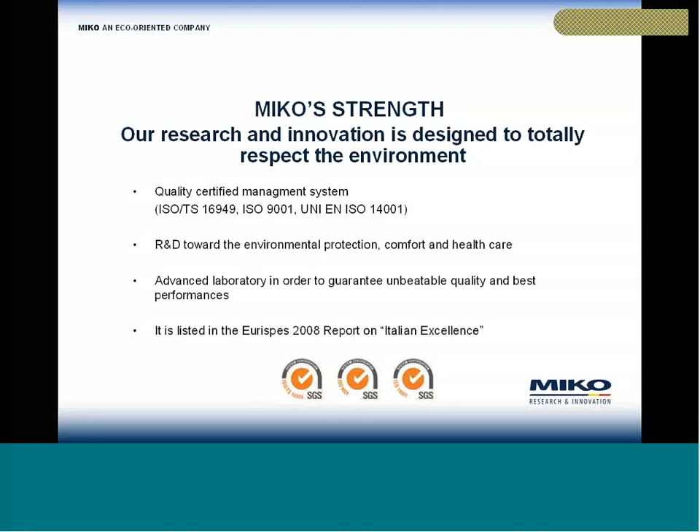As evidence of Miko's accomplishments, it has been listed in the Eurispes 2008 report among the best Italian excellences during 2008. So we are very proud of our latest accomplishments.

Speaking of the sectors of application of Dinamica, we have a wide range of sectors. Some are old ones we've been working on for many years; others are still in progress, but we are developing new products with new performances and qualities.

Looking at upholstery and automotive, which are right now the two biggest sectors in which Dinamica finds its application. Comparing the two, even though upholstery was the first sector ever discovered, automotive is quickly taking over. Miko has registered an increase of 759% since 2007 in the automotive industry.

Going through some examples, here are some different programs we did in the past, just to emphasize the acceleration of the work Dinamica is doing in the automotive industry.

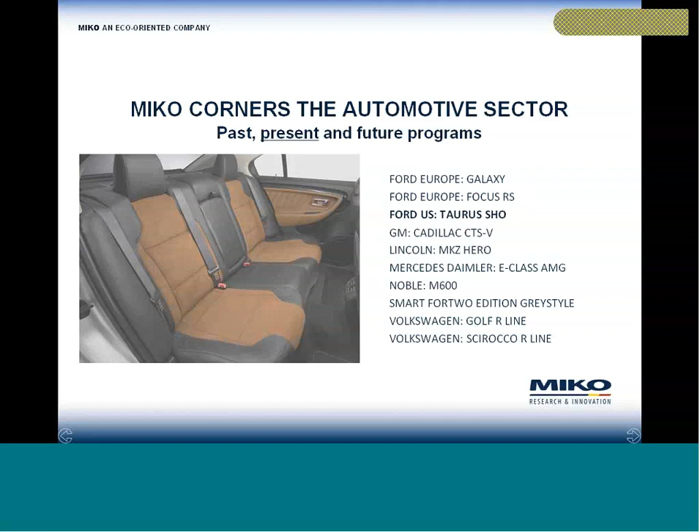Here are some old projects shown at different motor shows in the past. Compared with the present, we can clearly see the number has doubled. Here are cars shown at European and also United States motor shows. Most of these belong to the last year or year and a half, so they're basically recent programs.

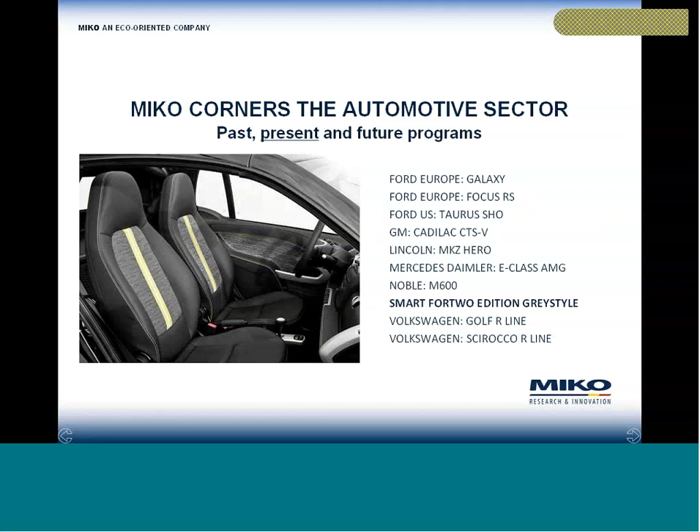And for the future, we already have some programs underway. Some are just in a first stage, others are more developed than just an idea. So we'll see some concrete cars coming up in the near future.

Let me introduce Dinamica, which is the combination of Japanese and Italian technology and research, and it's the first microfiber suede up to 100% ecological.

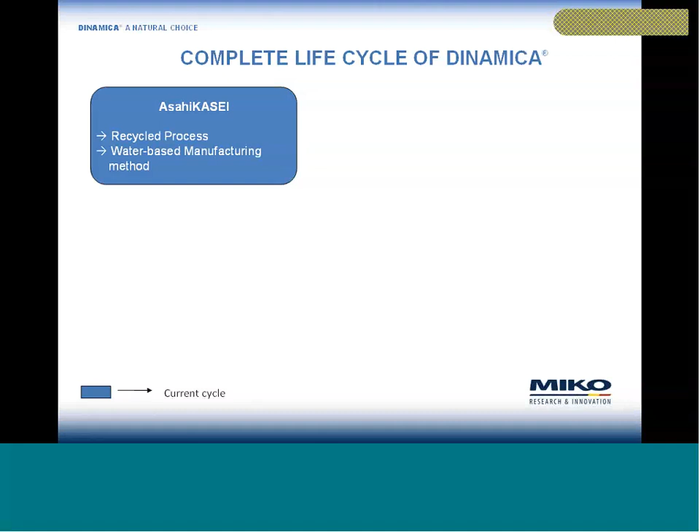The complete life cycle of Dinamica starts in Japan at Asahi Kasei, then goes to Miko, which is settled in Italy. For automotive, we have a laminator working with us, which handles the lamination and partly the distribution. From there, we go to our final clients, represented by OEMs and Tier 1s.

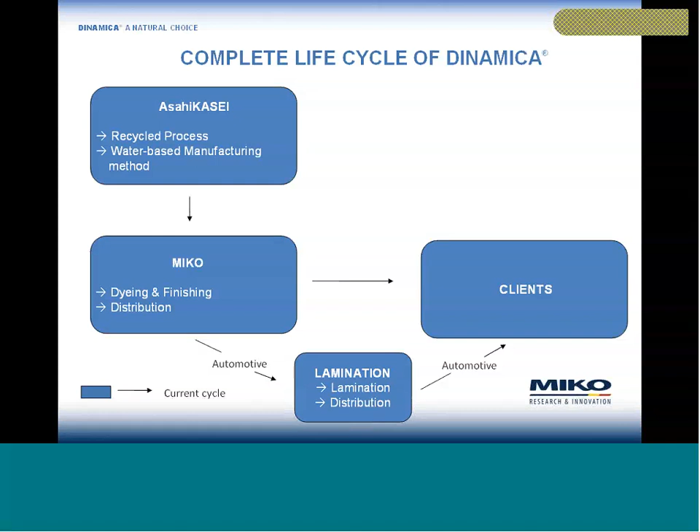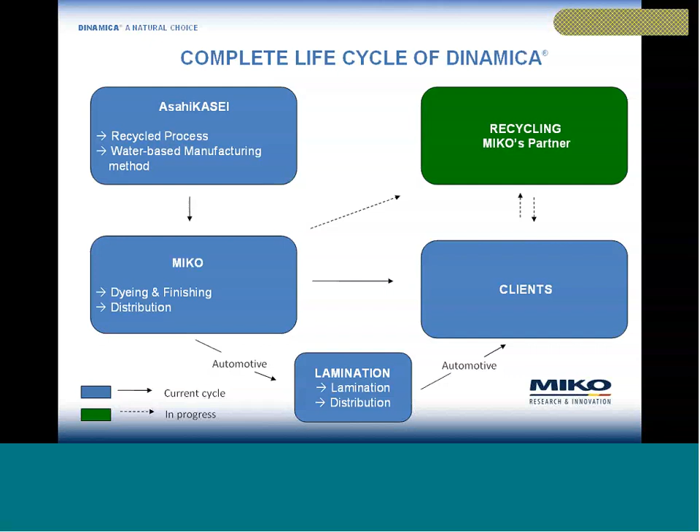This is our current cycle, which is what we are actually doing right now, but we are also developing the very last phase of this life cycle, which is the recycling part. This part is still in its first stage and still in progress, but we are really trying and hoping to further develop this last step in the future.

Before talking about the actual process in making the raw substrate of Dinamica, I want to share some information regarding the recycled part of the polyester. Dinamica is made with recycled polyester, which is taken from a recycling process.

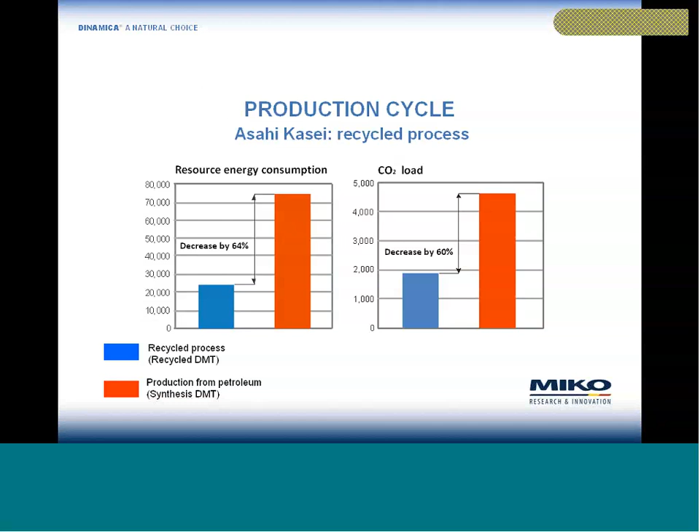Recycled fibers such as T-shirts or other polyester clothes, PET bottles, or other plastic objects are recycled. Comparing this process of obtaining polyester to the classical cycle of making polyester from petroleum, we can see how the energy consumption and CO2 emissions are largely decreased. This number should be kept in mind for final consideration regarding the environmental impact of our product.

Starting from Asahi Kasei, the ultra-fine recycled polyester goes to spinning and cutting in order to obtain a fiber which is very fine. We are talking about 3 to 5 millimeter length, but at the same time very resistant.

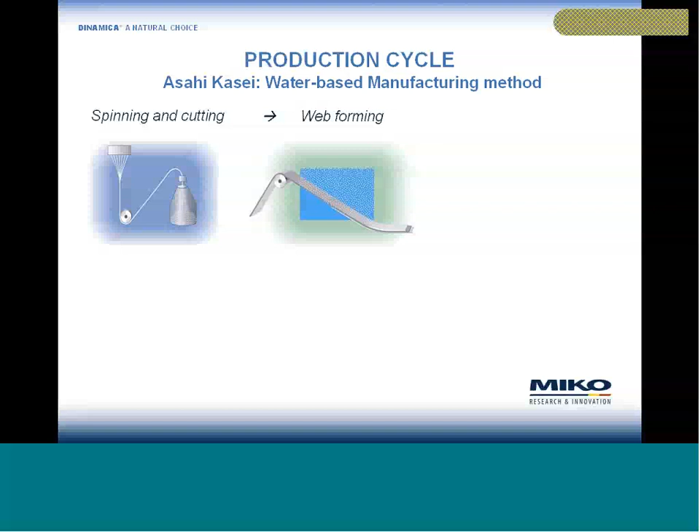From the cutting and spinning, using what is also known as the wet-lay method, the cut microfiber is dispersed in a water solution. A support screen runs through the water and catches the microfiber on the surface and on the backside. This cut microfiber is then laid on the screen, and during the next phase, water needling, high-pressure water jets fix the microfiber on the screen.

The two layers, on the surface and the backside, are entangled with each other and the screen without any damage to the fiber. During these two phases, all the water used during production is then cleaned and returned into the environment. So we can clearly see that even though the production cycle of making Dinamica is based on water, there is no waste of water at the end of the cycle.

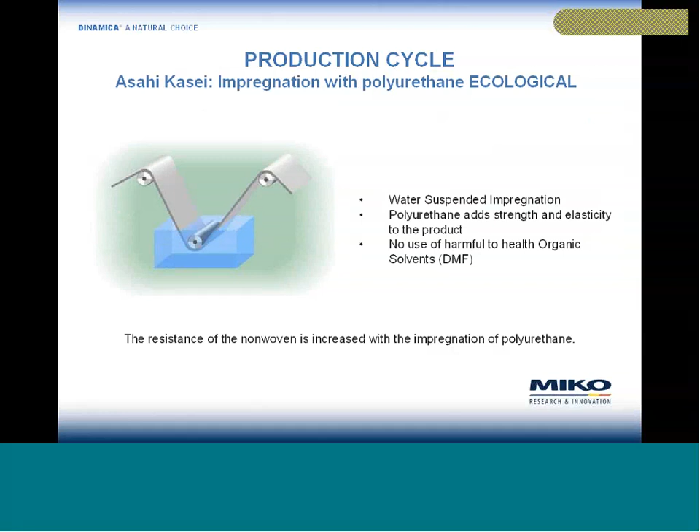From here, we go to the impregnation with polyurethane. The resistance of the non-woven is largely increased with the impregnation of polyurethane. The microfiber is suspended in a water solution in which no harmful solvents are used. The polyurethane adds strength and elasticity to the fabric, which is overall very important for the end product.

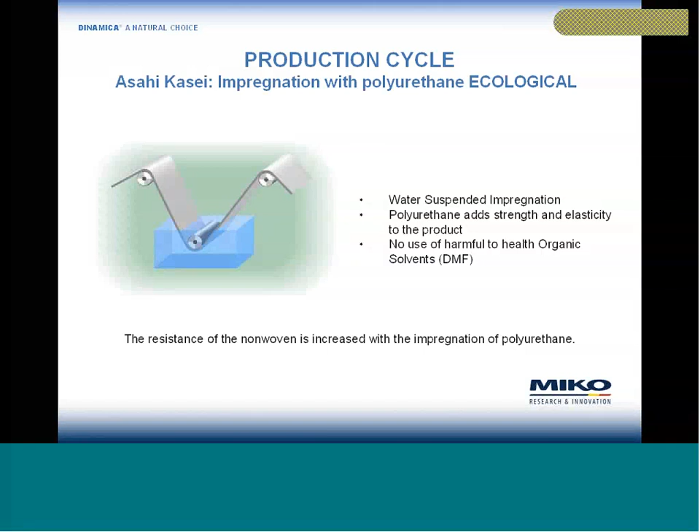If we compare this production cycle, also known as ecological, to other cycles known as non-ecological, we can see a totally different process. First, the non-woven creation is based on carding and needle punching, not water needling. The structure of the polyester is different because, in order to preserve the microfiber from being damaged during needle punching, it's necessary to use another type of structure called the sea island fiber.

The sea island structure is the one you can see on the left side of your screen, the blue area with yellow spots inside. The yellow part represents the microfiber, while the sea island is composed of other elements that serve to protect the microfiber. At the end of the entanglement of the fibers, the sea element, the blue part, must be dissolved in order to obtain the microfiber. During this dissolution phase, a harmful organic solvent can be used.

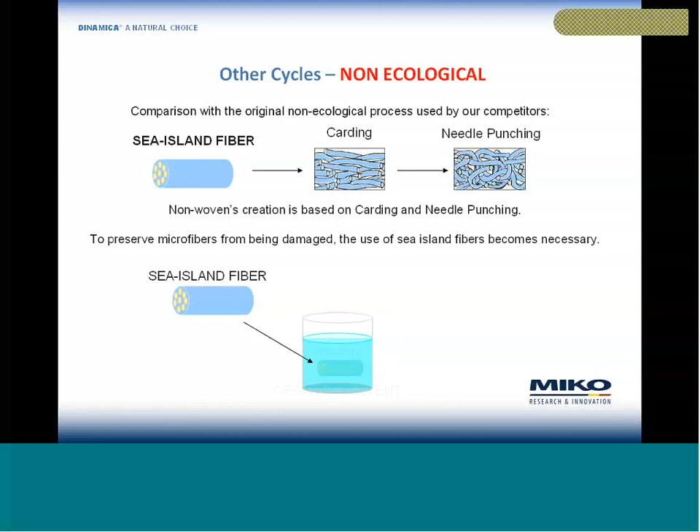This is a quick drawing that shows the actual process. We see the sea island fiber that is dissolved using organic solvent in order to obtain microfiber. This is a process completely different from the one used for making the substrate of Dinamica.

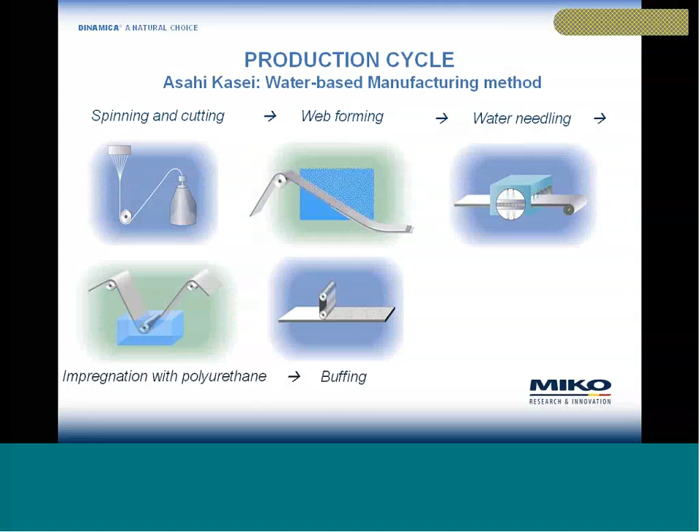Going back to the water-based manufacturing method, at this point we have the buffing, which is an important phase to give regularity to the non-woven surface. The microfiber gets a luxurious appearance, evenness, and a soft end feel. At this point, the raw base is ready to go to Miko.

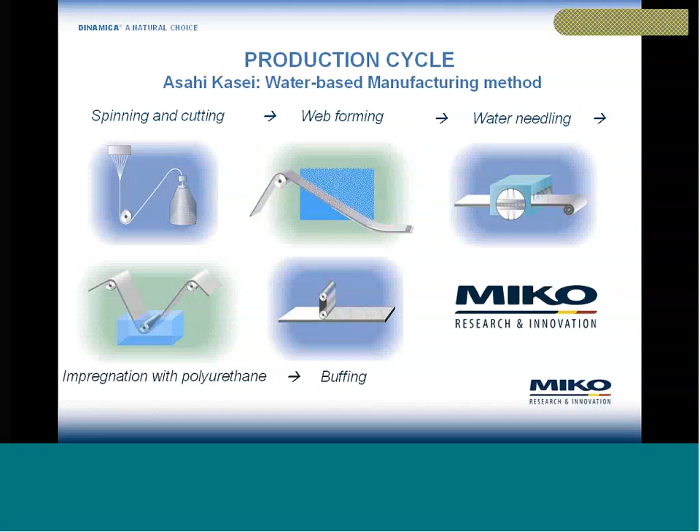Before talking about the dyeing and finishing, the last two parts of the production of Dinamica, let me spend a few words on how Miko works in research and development, because our work starts well before the dyeing and finishing—it actually starts in our laboratory, which is the heart of our innovation.

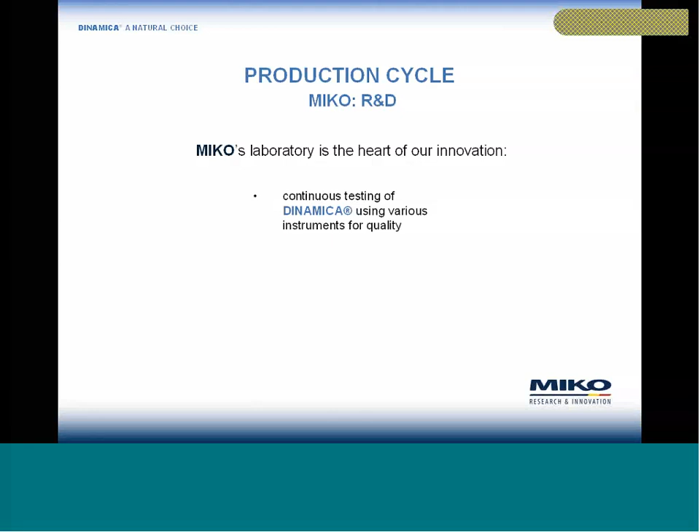Here we use different types of instruments to test the quality of our products in terms of resistance, light fastness, color fluctuation, abrasion, and all other tests required by our clients. We also study new recipes for the colors and select the chemicals used during the production phase.

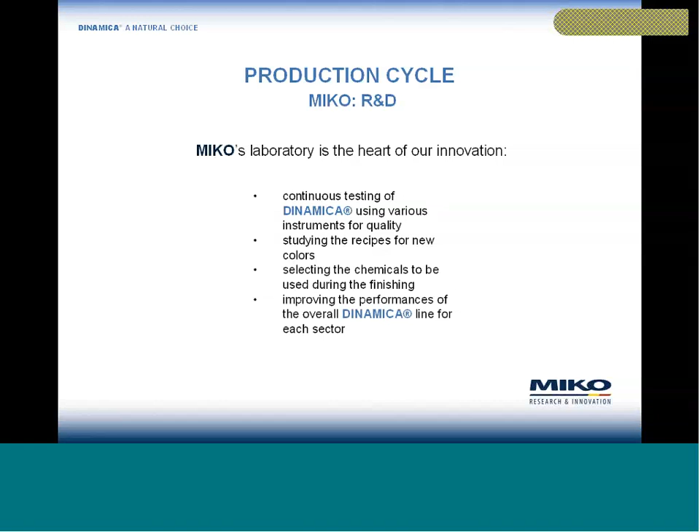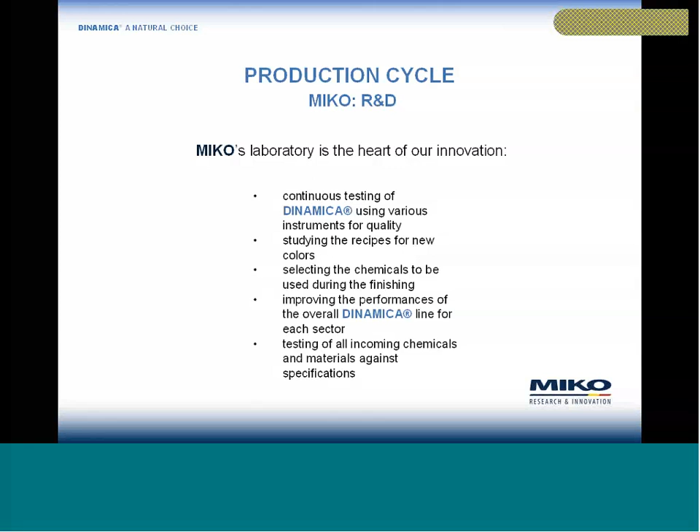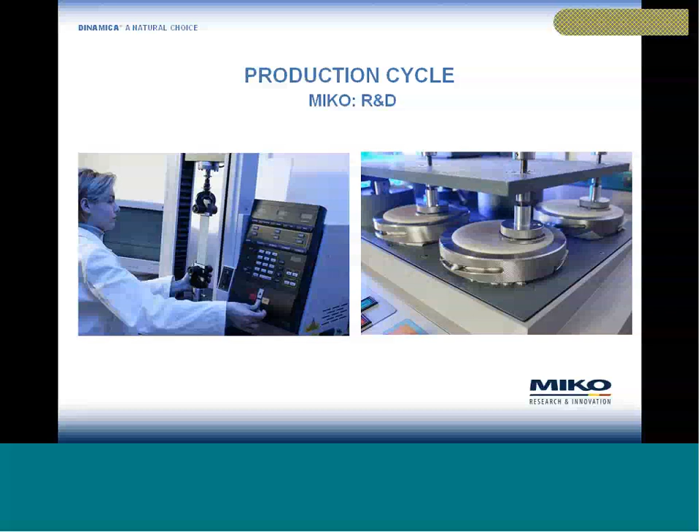We constantly try to improve the performance of our Dinamica line for each sector, and we test all incoming chemicals and materials against specifications. So we can seriously manage different types of tests and work in order to obtain a final product that can completely satisfy our clients and customers.

During the dyeing, the microfiber is colored with jets at high pressure and temperatures. The high quality of the dye stuff guarantees top lightfastness and performance. During the finishing, the microfiber is treated to get the final aspect and performance of Dinamica, which include waterproof, stain resistance, anti-static, fire resistant, antimycotic, and everything requested.

During these last two phases, Miko does not use solvents during the production of Dinamica, but employs just non-toxic methods and a water-based manufacturing cycle.

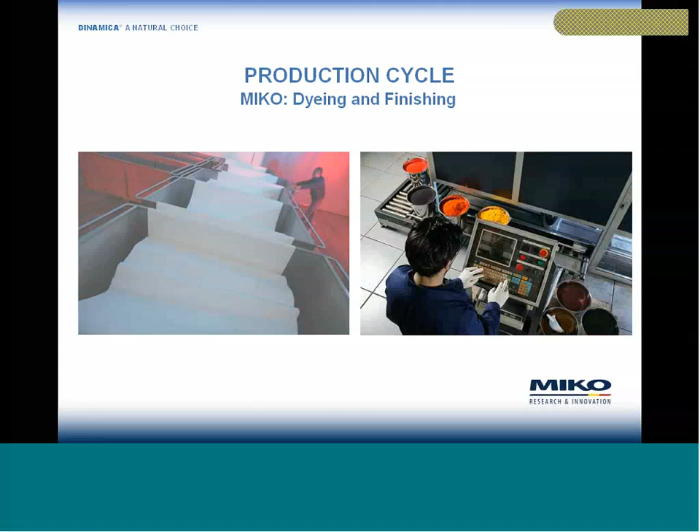Just to show you some quick pictures, you can see on your left how the raw base material comes into our facility. We start the dyeing of all our products only from a white raw base, and from here we can clearly make each type of color and finishing we want. We have different production machines for the dyeing in order to get different roll sizes, which is also important for our clients to be able to decide upon the quantity of meter of roll they want to buy.

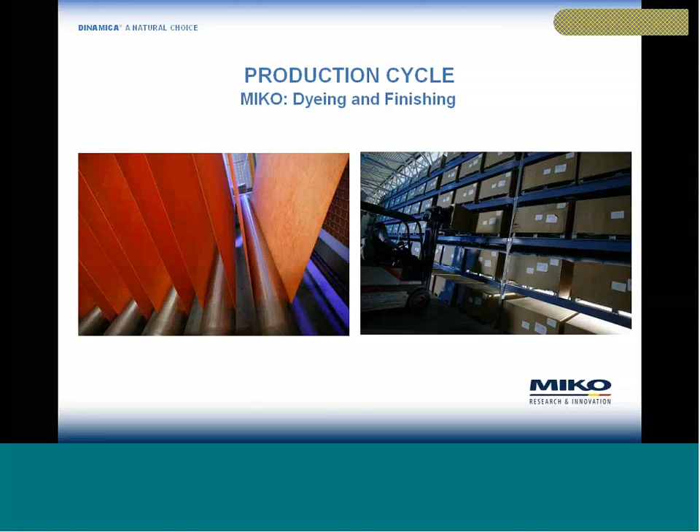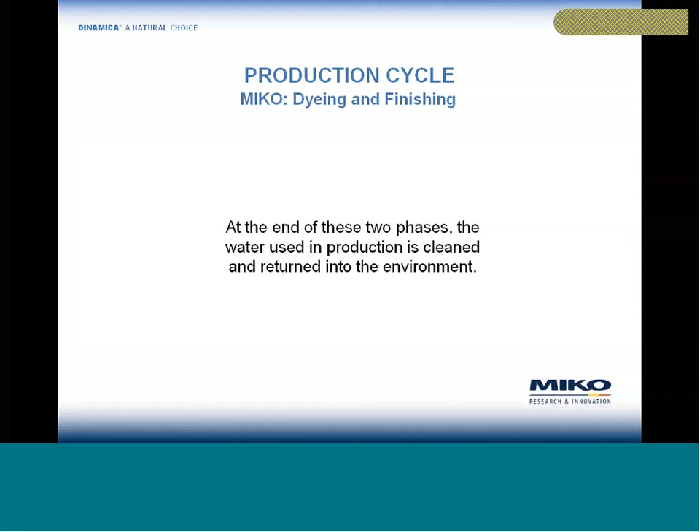Then during the production, the microfiber is cleaned and goes through different phases in order to have our final product, which is then kept in stock before handling to our clients. Here again, all the water used during the production is then cleaned and put back into the environment.

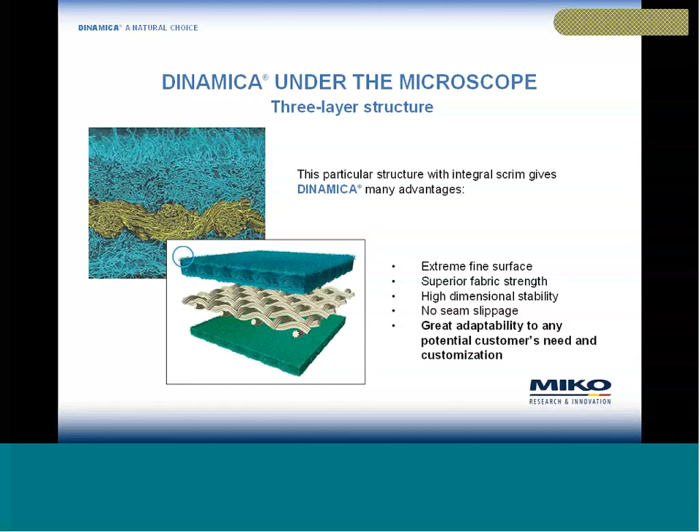Looking at the product we realized for automotive, I'd like to show you Dinamica Auto. You can clearly see the three-layer structure. What makes Dinamica Auto unique is the FR polyester back. That's important because by changing one of the three layers of Dinamica, we can come up with a product suitable for automotive, which can already pass the FR standards for automotive without the need for an additional scrim that can pass FR. So this is something maybe that should keep in mind.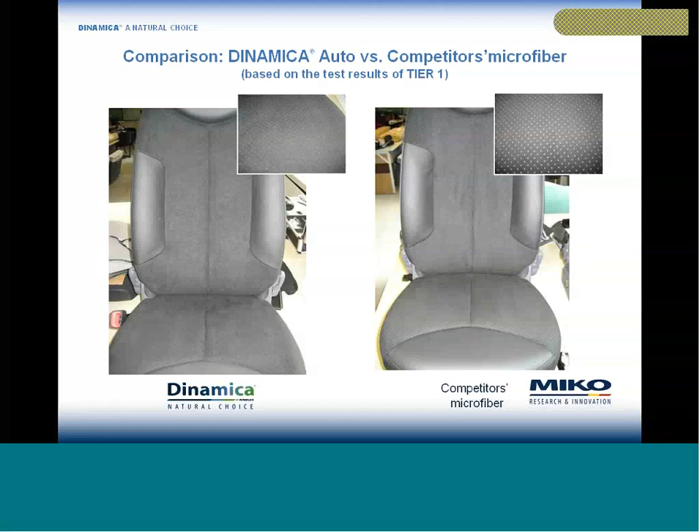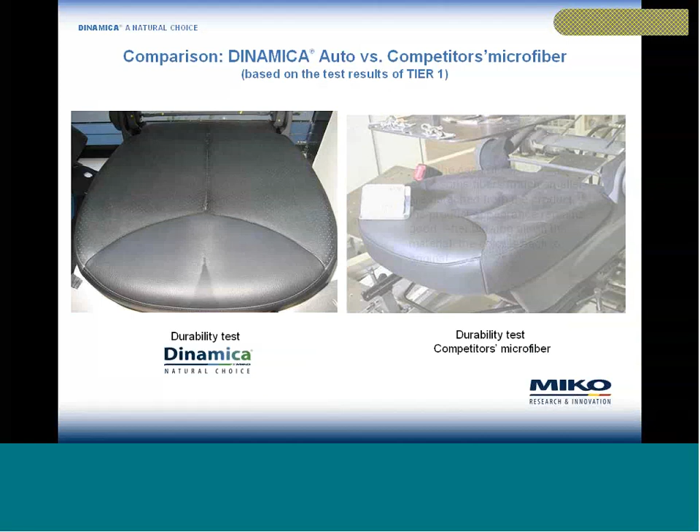Our Tier 1 did some tests in terms of durability, and we have completely different results. On the left side, you see our seat made in Dinamica. You can see here that some fibers, much smaller than in the other case, are detached from the product. The product appearance remains good overall. Just by blowing some air and brushing the pile, the color and the microfiber go back to their original.

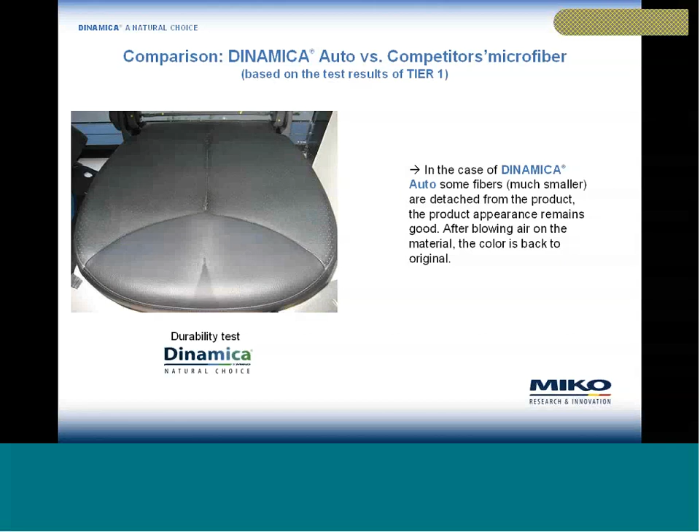This is interesting because it points out that our technology is designed for the microfibers not to break from the surface, thereby making the pilling issue impossible. On the other hand, if we go back to our competitor's seat, we can clearly see that some fibers are broken during this test, leading to the problem of pilling.

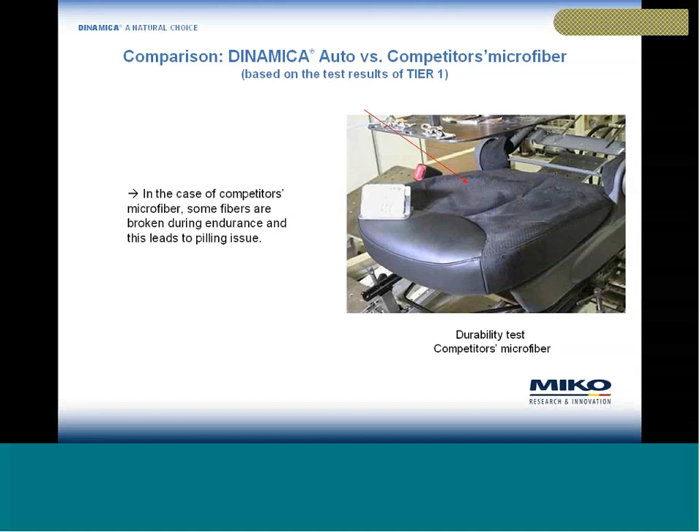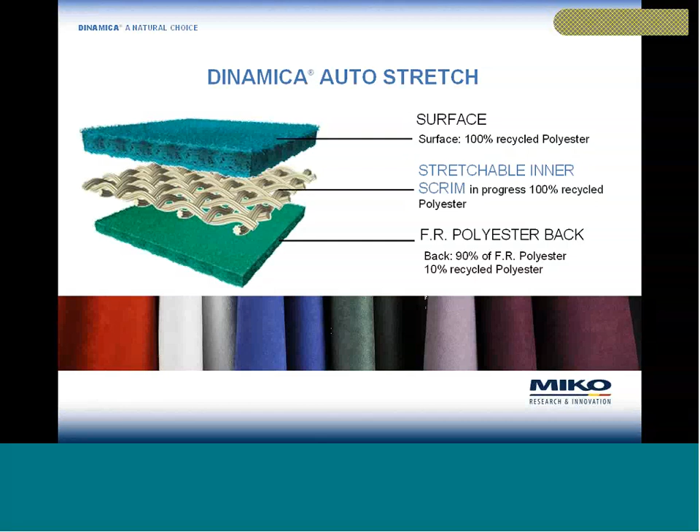Another product for the automotive sector is Dinamica Auto Stretch. Like Dinamica Auto, the backside is made with FR polyester, but what makes this product unique is the stretchable inner scrim, which makes this product suitable for different types of application inside the car, such as door panels, pillars, and headliners—for all those surfaces where stretchable microfiber works better.

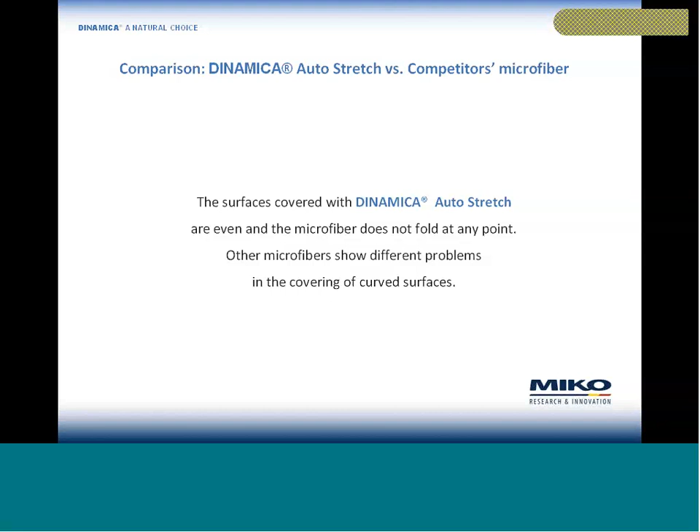If we compare again Dinamica Auto Stretch against our competitor microfiber, we can see other advantages. The surface covered with Dinamica Auto Stretch is even, and the microfiber does really well cover all points without showing any faults. On the other hand, looking at our competitor's microfiber, we can see how there are some problems in covering curved surfaces.

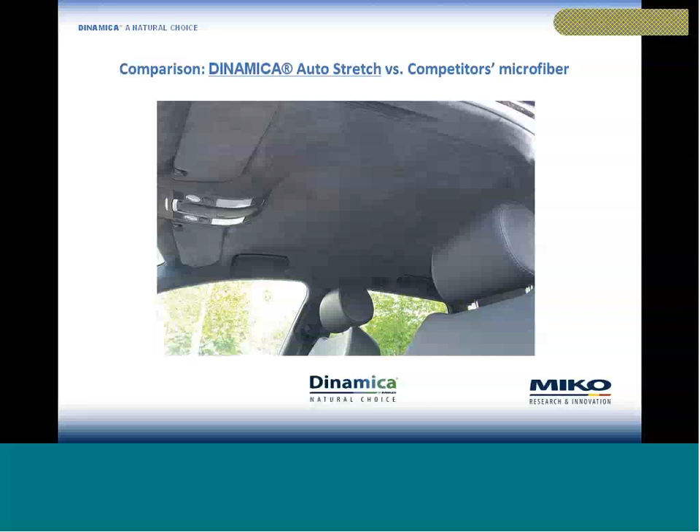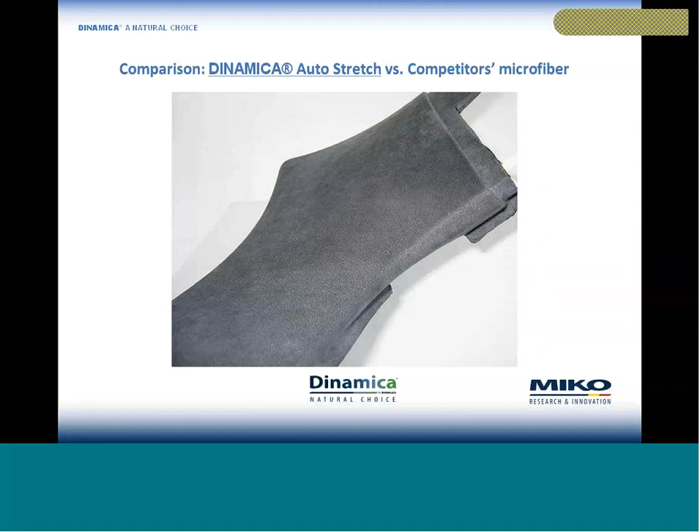These are some pictures showing Dinamica Auto Stretch. You can see here an example of a headliner or other curved part inside the car. You can see how Dinamica Auto Stretch really nicely works well for these curved surfaces.

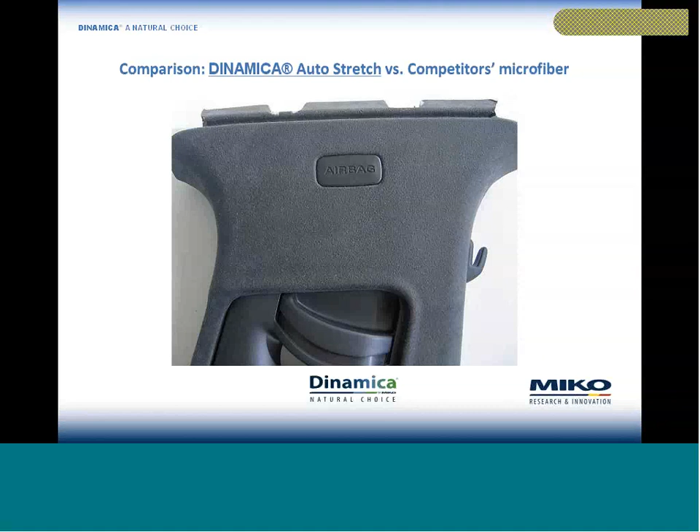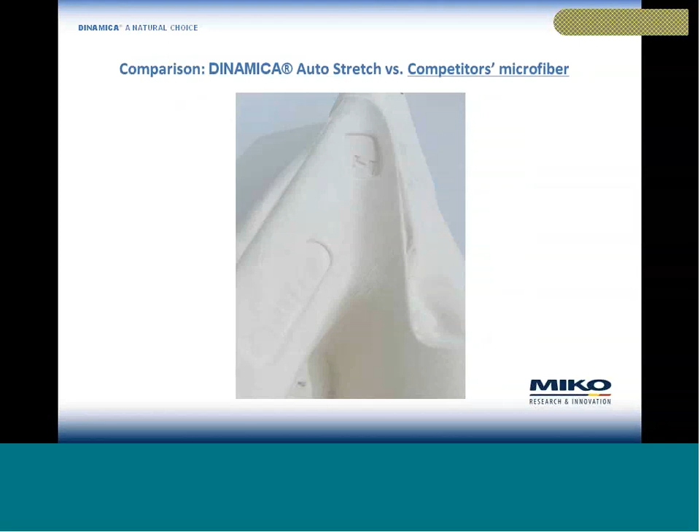We don't see any clear points of defects or problems with the microfiber. On the other hand, here are some pictures of examples from our competitors, and here you can see some visible problems. Clearly, the surface is not well covered, leading to these defects, which are unpleasant in the overall aspect of the vehicle.

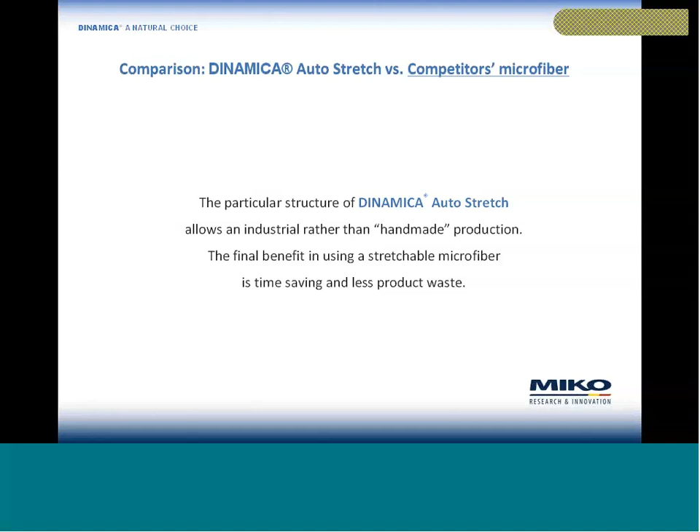The particular structure of Dinamica Auto Stretch allows an industrial rather than a handmade production, and this leads to further benefit in terms of time saving and less product waste.

By changing one of the three layers of Dinamica, we can also create new products. For example, this is a combination of our product melange on the structure of Dinamica Auto. So we can still see the FR back, but with the change of the surface using one of our products that is very largely used, especially in upholstery.

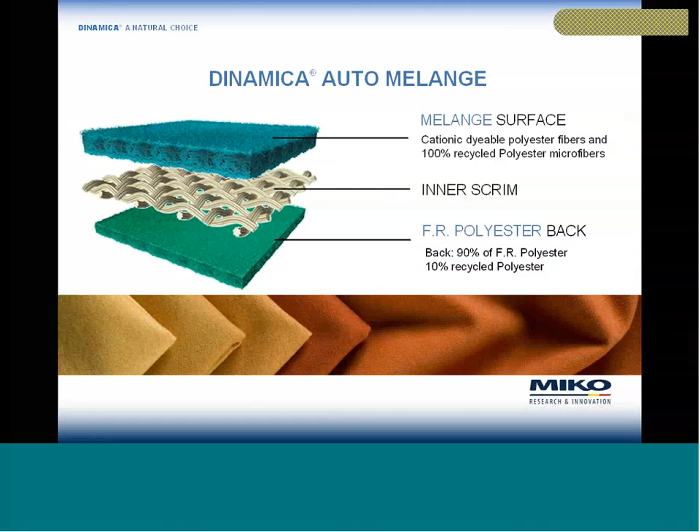And the same we can also do with our product silk. Again, by changing just the surface, we can still keep the performances of Dinamica Auto, but just change the look appearance of the suede.

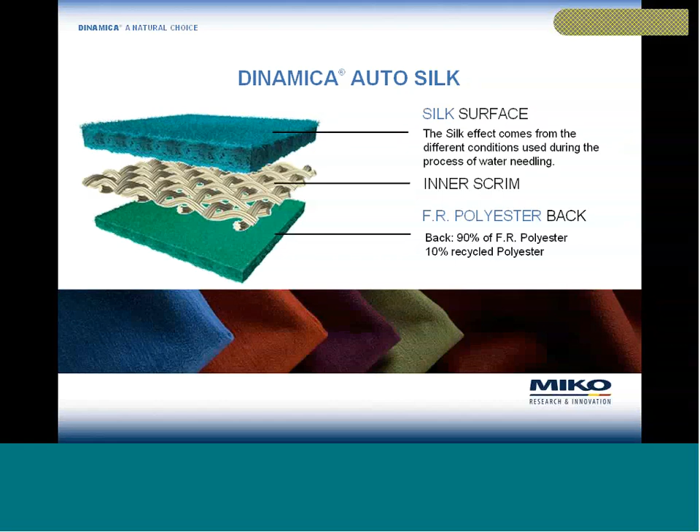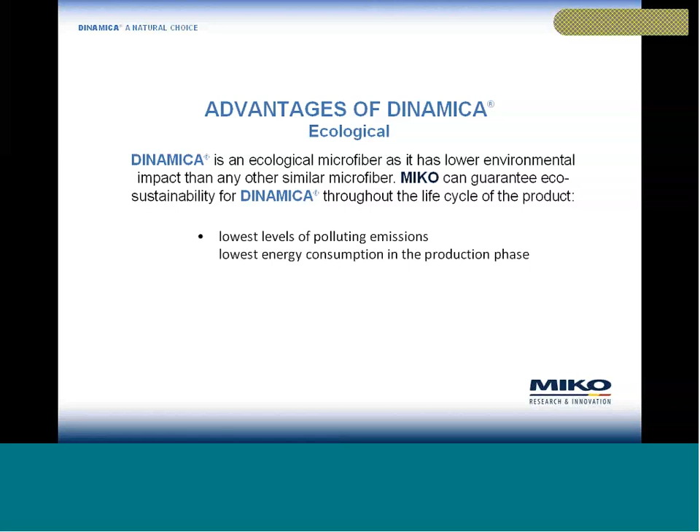Talking about the advantages of Dinamica, first of all, Dinamica is an ecological product because it has lower environmental impact than any other similar microfiber. Miko can guarantee during the whole life cycle of the product the lowest level of polluting emission, the lowest energy consumption during production, and no toxic or polluting chemicals during production. Dinamica is made from recycled polyester, and it's designed to guarantee easy disposal, and it's 100% recyclable at the end of life of the product.

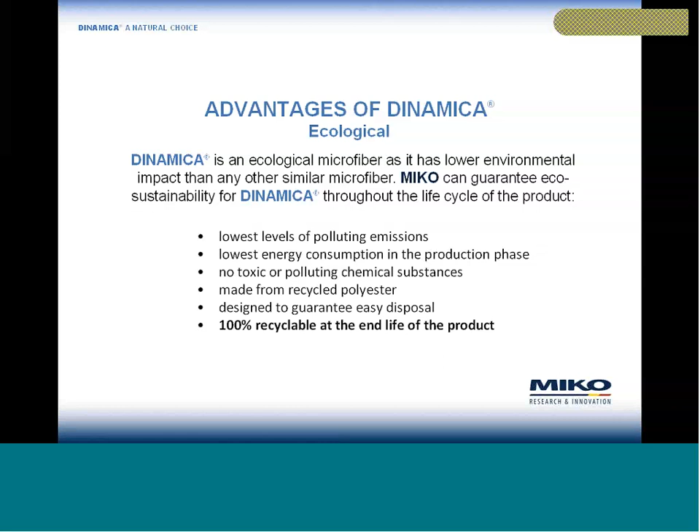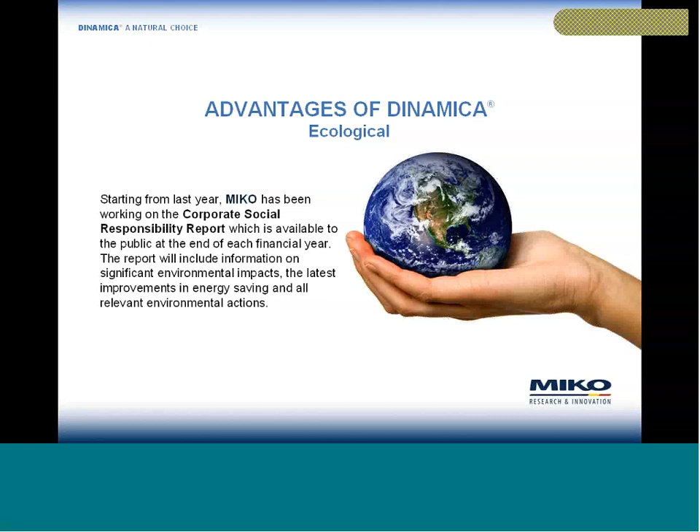Starting from last year, we've been working on the corporate social responsibility report. We just presented the one for the year 2009, which is available to our clients. This report will be given away at the end of each financial year, and will include relevant information on environmental action, on the latest improvement in energy saving, and all other aspects dealing with the green aspect of the product.

Dinamica is a certified product according to Oeko-Tex 100 certification of Class 2, which is for products that come into direct contact with the skin. This certification guarantees the absolute absence of harmful elements in the finished product.

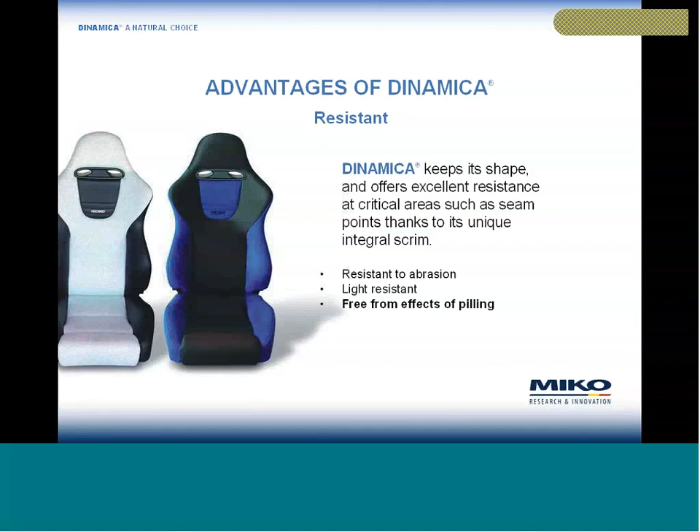It is resistant because Dinamica keeps its shape thanks to our unique technology of the integral scrim. It is resistant to abrasion, has high light resistance, and as said before, it's free from the effect of pilling. This enables our material to retain its shape and appearance longer and in better condition than competitive materials, which should be considered especially for automotive, where long-term performance and appearance is requested for the luxury appeal of the vehicle.

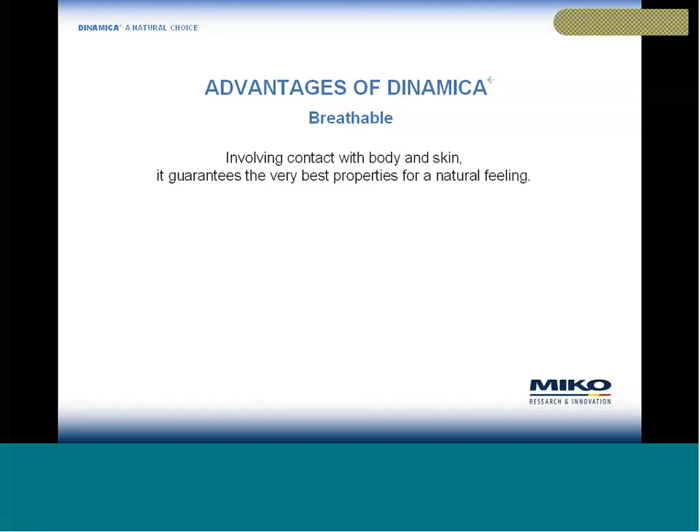Dinamica is breathable. Breathability has a direct correlation with comfort. In contact with the body and skin, Dinamica guarantees the property of a natural feeling.

We also have data that shows this performance of Dinamica. We compare Dinamica Auto laminated with 5mm foam against another type of microfiber laminated with the same foam. We can see that Dinamica's number is almost double, actually more than double, than our competitor, indicating that more water vapor passes through the fibers of Dinamica, making the suede much more breathable.

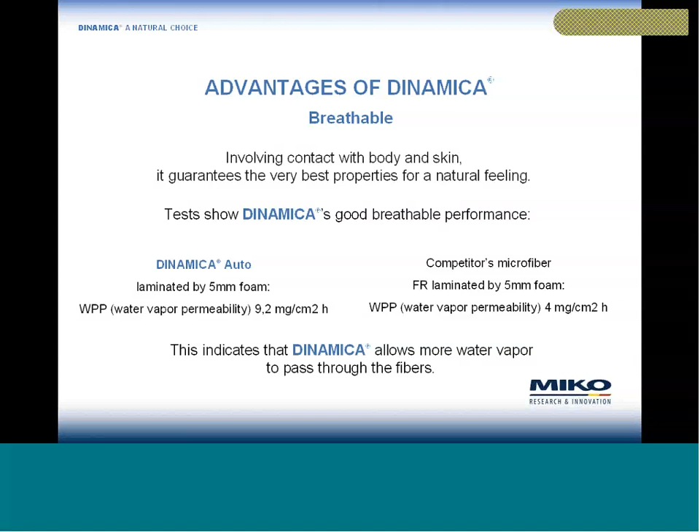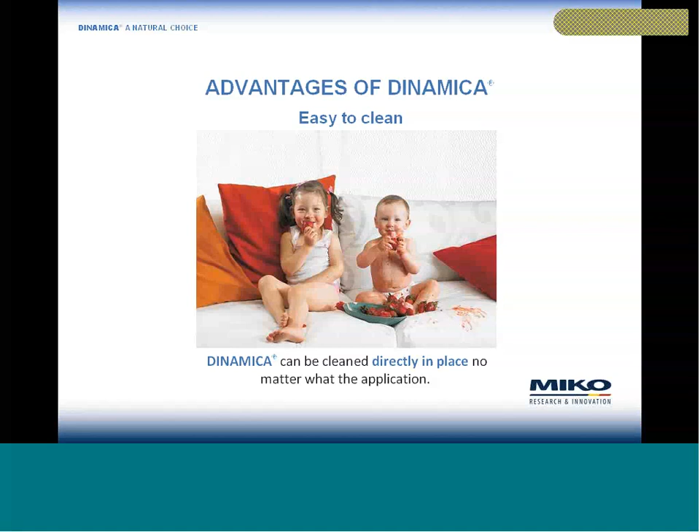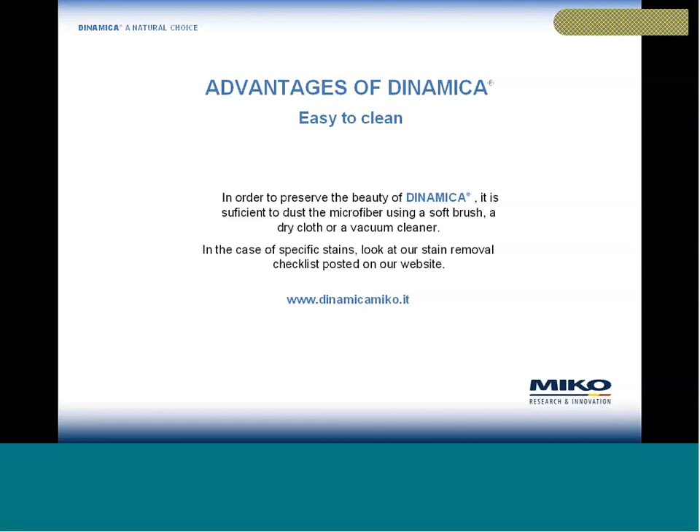Dinamica is easy to clean, and this is also important for automotive because cleaning in the case of a non-removable seat has to be done directly in place, and this is something that can be done with Dinamica. It's also easy to preserve the beauty of Dinamica because just by using a soft brush, a vacuum cleaner, or a dry cloth to raise the pile, the beauty of Dinamica comes back each time. In case of more persistent stains, we also have a stain removal checklist posted on our website that people can take a look at.

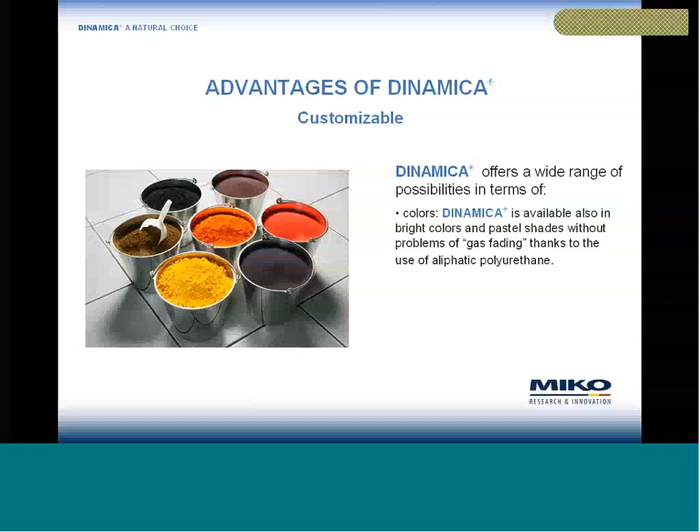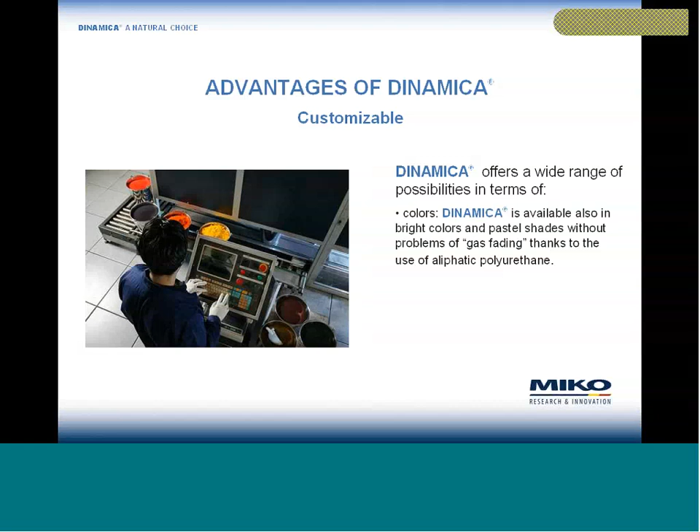Dinamica is customizable, offering a wide range of possibilities in terms of colors. As I said before, Dinamica is available in bright colors and pastel shades, without the problem of gas fading. We start the dyeing from a white raw base, so basically each color can be made available to our clients.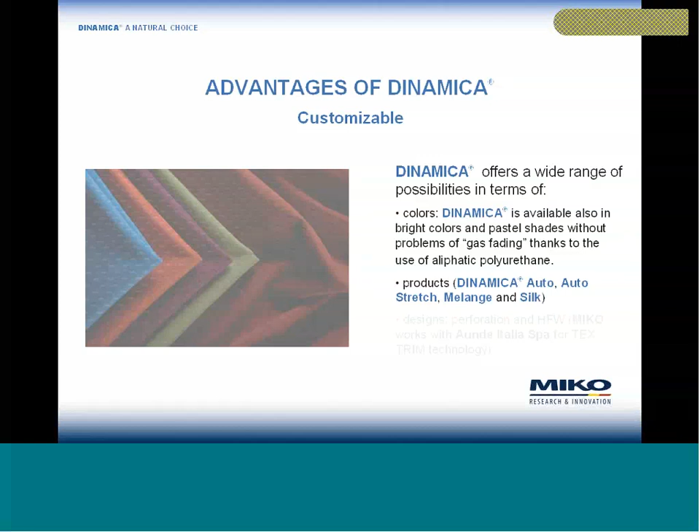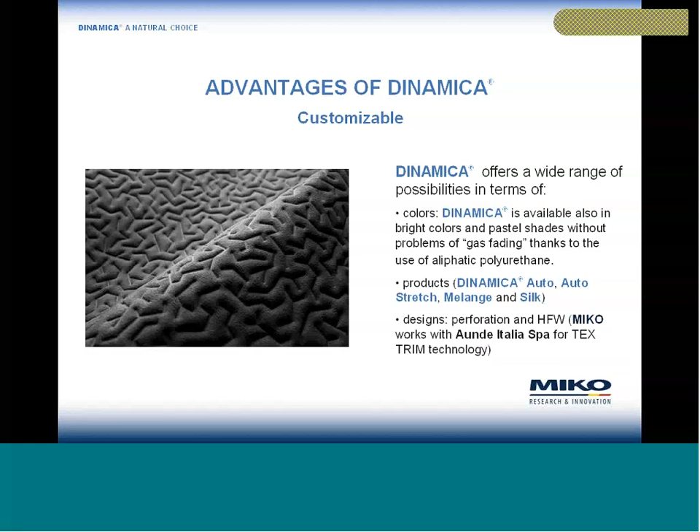Also, there is a wide range of products. As I explained before, besides Dinamica Auto and Dinamica Auto Stretch, we can combine our three-layer structure and change it to get different types of products, such as the melange and the silk. Plus, we also have different designs, for example perforation or high-frequency welding. Miko is actually working with Aunde Italia on the technology called TEX TRIM to get this type of effect. So I hope that by this brief presentation, the technology behind these pictures is more clear.

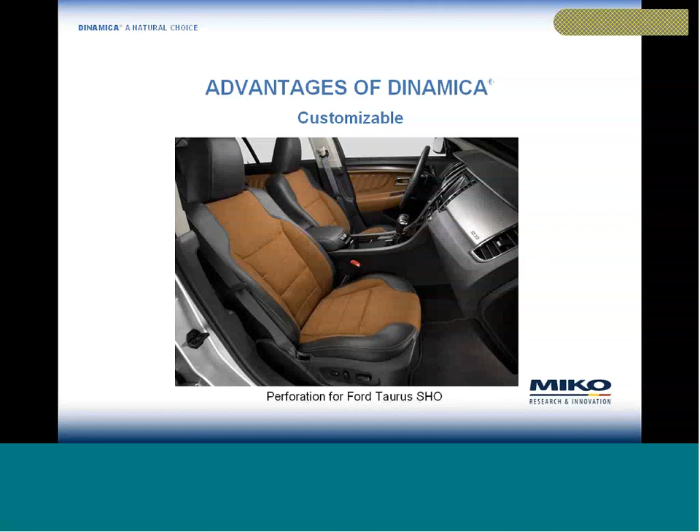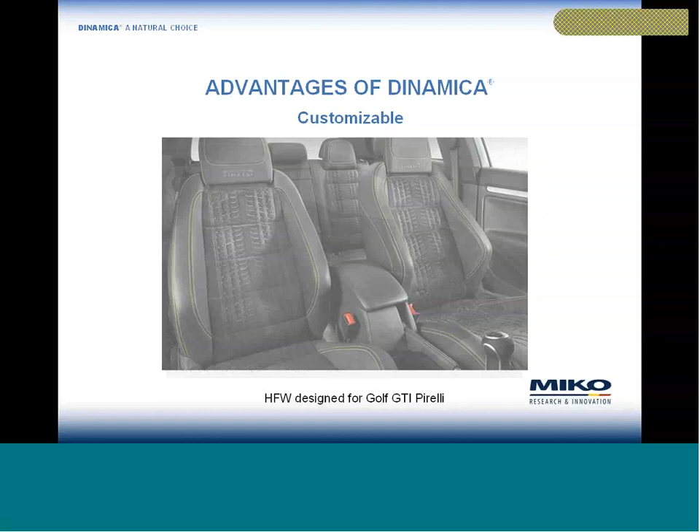Here again, we have the example of a type of perforation for the Ford Taurus SHO, some high-frequency welding designed for a Golf GTI Pirelli, and the insert of a pastel shade of Dinamica in the seat of the Smart 42 Edition Gray style. Here you can see how our textile microfiber Dinamica is combined with other types of products such as leather and another textile, and you can see how nicely it fits inside the vehicle.

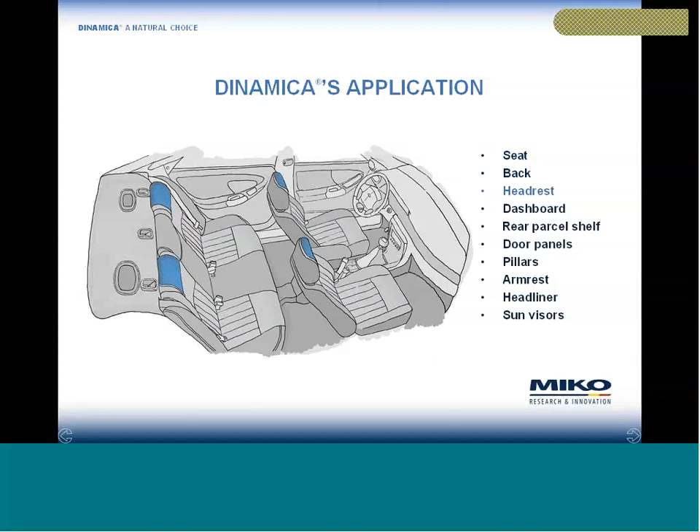So just to quickly sum up the different applications inside a car, Dinamica can be suitable for the seat or the back and many other places where it can be personalized and nicely create an overall fine and comfortable ambience. Also, I'd like to mention the headliner and sun visors, which I couldn't show you from this view.

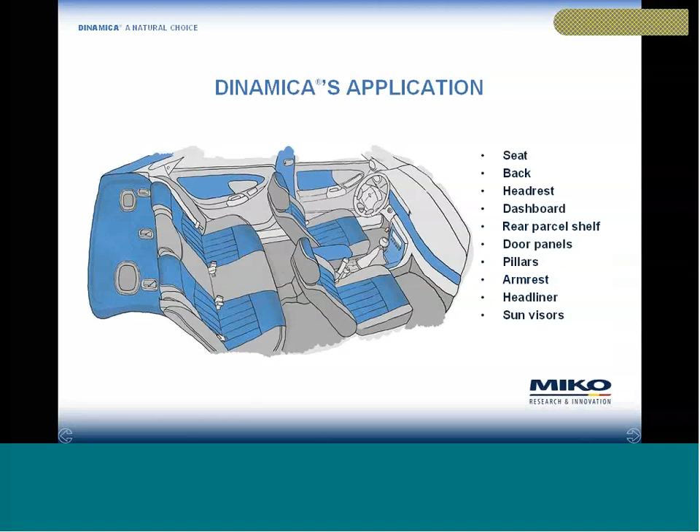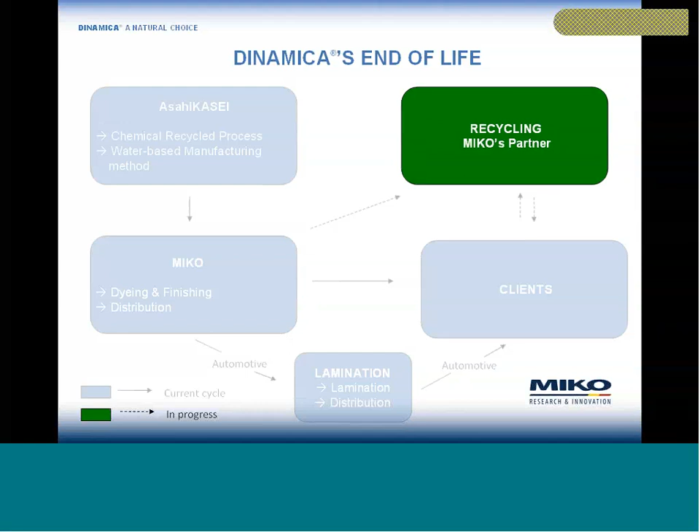So going to the very last conclusion of this presentation, I'd just like to spend some words on the very last phase of the Dinamica end of life, which is the recycling part.

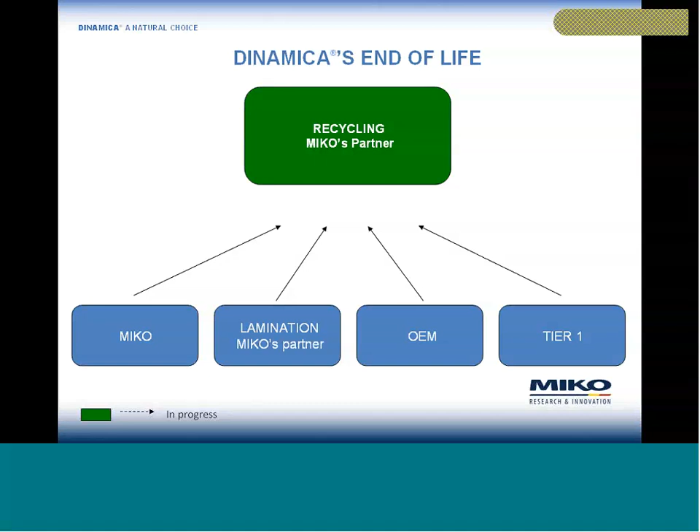As I said, this is just in progress, but the idea is to get from each part which handles Dinamica, either the textile from scraps or even from seat covers, in order to recycle the product at the end of its use. So the idea is to get from all these parts the product Dinamica, which can be transformed into another product that can be sold to our clients, and this type of product can be recycled again and again.

So this approach of recycling is still at the first stage, but however, some concrete agreements were made last year in order to recycle Dinamica. So the idea is to get from our textile something which is completely different, but can have a concrete application also in sectors such as automotive.

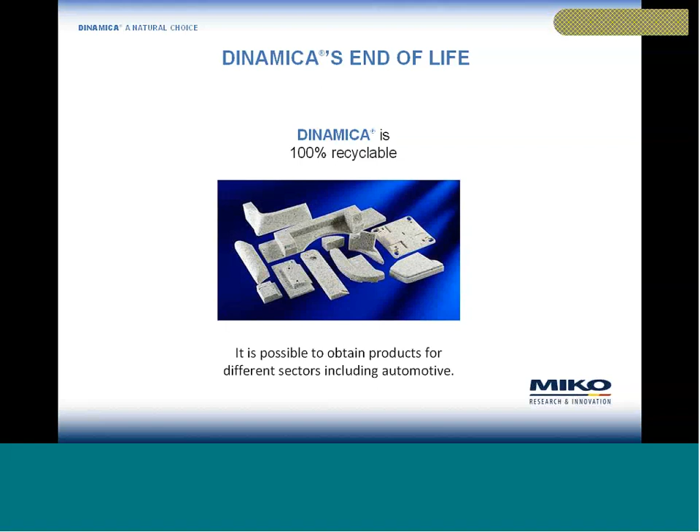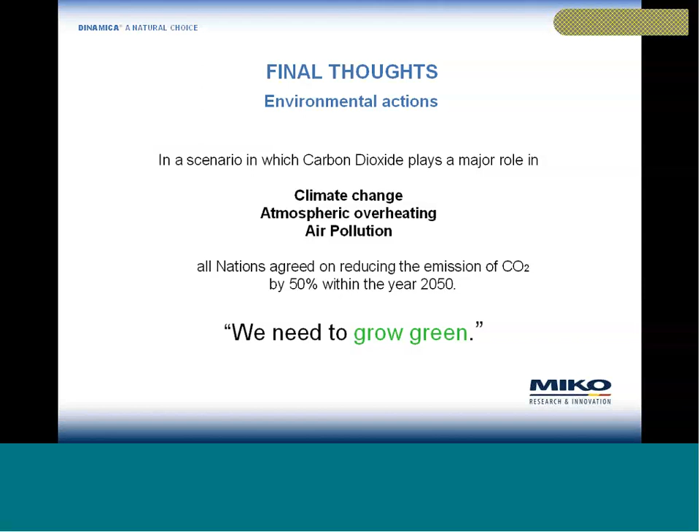So just to wrap up all these arguments, in a scenario in which CO2 emissions play a major role in the dramatic climate change and atmospheric overheating and pollution, we already saw that all nations agree in the reducing of CO2 emissions by 50% within the year 2050, with the hope to all grow green.

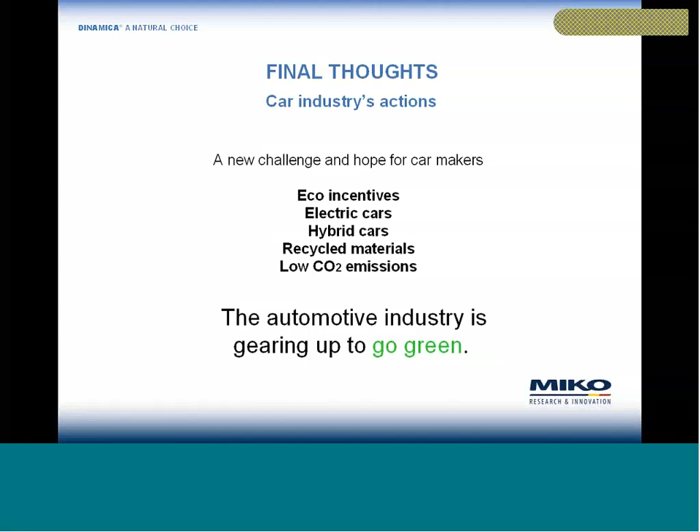So the car industry is actually moving toward this direction, and we have some concrete examples in this sector with the introduction of many hybrid cars, electric cars, cars which use even more and more recycled materials, showing that automotive is also gearing up to go green.

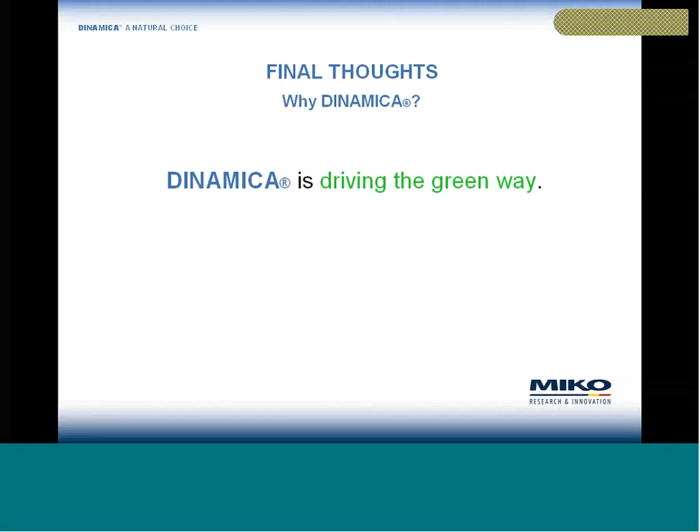So why Dinamica? Because Dinamica is driving the green way, is already moving toward this direction. Because no other microfiber has reached the same level of green technology. And more importantly, the environment is not a fashion for Miko, which has always invested in green solutions since its foundation in 1997.

And because the proof of Miko's mission is Dinamica, which is a high-performance, premium quality suede that can pass the requirements set by each sector application, including automotive.

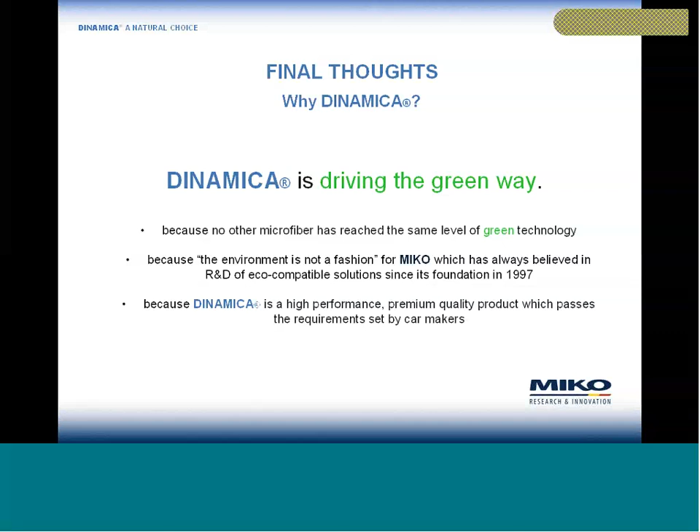So this is basically just a brief introduction to our product Dinamica, and I will leave it for some questions.